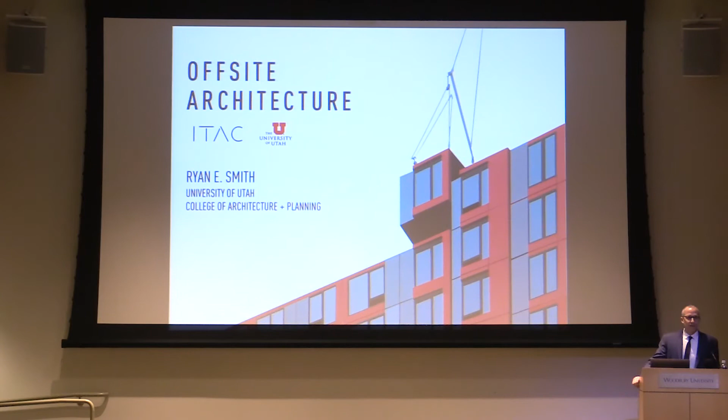Yasushi told me that his students are going to achieve better grades if they move closer to the front. No, that didn't land, did it? No. Okay, thanks for having me.

I really appreciate it. I'm from Salt Lake City, Utah. If you're not familiar where Salt Lake City is, it's on the edge of the Wasatch Front ski territory. Please visit, come. I'm a bit unique in that, yes, I do have many children. One wife, but many children.

And this is Lindsay and my kids. And the boy in the lower left-hand corner is Owen. He has his leg broken. This was last year. We pretty much have one of our kids in this situation at any given time. So in order to avoid having to parent all the time, my wife and I travel a lot.

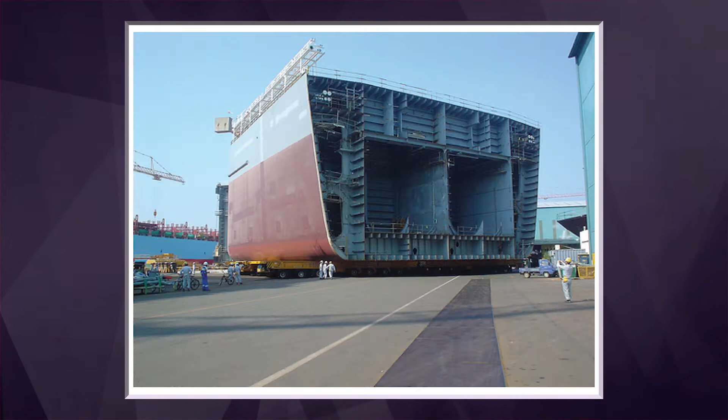We go to factories and job sites throughout the world. I just recently got back from Japan. And because I like to go visit buildings, which all of you do, my wife isolated me one year in the summer in the Caribbean on a cruise ship. But what do you think happened on the cruise ship? I was really interested in this, right? This is an incredible building, by the way.

It is unsustainable, I will say that. However, it does take care of thousands of individuals' waste and is able to process it. We had an opportunity, my wife's a chef, and we took the tour. If you're ever on a cruise ship, take the tour of the kitchen, the back of house operations. It's absolutely incredible to see how they can take care of that many people in a small space.

Because I'm interested in production, how things are made, today I'm going to talk about why, what, when, and how of what's called off-site construction or prefabrication. So let's start with why.

Why are we even talking about this? If we think about the production of buildings compared to other production industries, say the production of this water bottle, right? Buildings are unique when compared to this water bottle in three distinct ways. I might call them the peculiarities of construction or architectural production. Number one, the site or the place in which the building is made, unlike this water bottle, is unique every single time. The program, or the form of this and what function it has to serve, is unique every single time. And the labor that is used to produce buildings is mutable and inconsistent every single time.

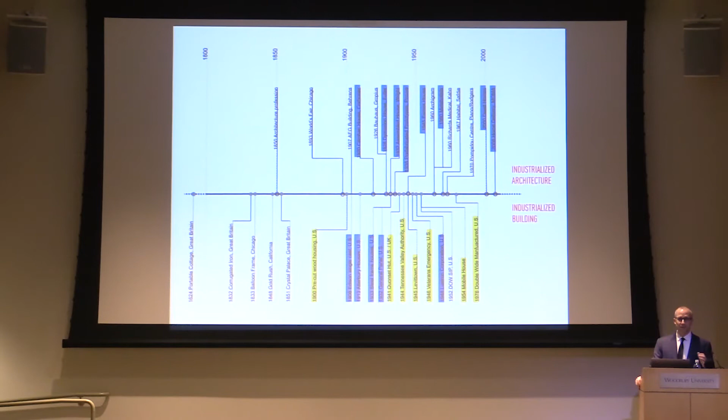The history of industrialized building or factory-produced building is long. This is not a new idea. If you've taken history from many of your professors here, you students or professionals, you know that this history is rich. I like to separate this into two different categories, however: one called industrialized architecture and the other called industrialized building. Sometimes these things overlap, but if you look at the history, they are quite distinct things.

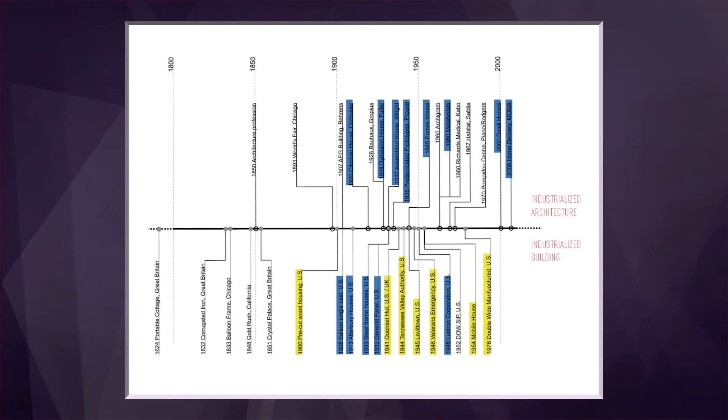If we look at industrial building, the ones in yellow are what I would call successes, meaning they served the masses. They helped people find shelter. They were affordable. This is primarily talking about housing. The ones on top are all architecture prototypes. They were one-off and never mass-produced. So it's interesting that we don't really find any solutions in the architectural realm that had an impact on society outside of a movement, a Gestalt movement, or some kind of aesthetic movement. What I'm interested in, the precis for this talk, is architecture serving more than just a prototype or an idea, but housing people and providing shelter in an affordable way.

So what do we learn from these lessons? These are four lessons I've pulled out and written about. One is from the history books: proprietary systems, meaning systems developed primarily by architects that are very unique in their details, are difficult for mass housing because they're difficult to reproduce. I'll give an example of Jean Prouvé, who was an industrialist but also an architect, French, who built some beautiful things. But they were all proprietary, and when they needed to be replaced, there was no one to do so—there's no factory to support that. Whereas the simple 2x4 wall is incredibly mass-produced, and it's also very easy to adapt over time.

Offsite, or prefabrication, is the research and development of a technology. Insomuch as a formal idea or an aesthetic idea might be in an architect's mind, ultimately the technology does have to play through and work. More importantly than this, offsite is a business plan. We've seen a lot of architect-led prefabrication companies pop up—there are many here in California as well. The challenge is that architects are not trained to think about the business model first. That's not where we succeed. But if there's no business plan, no business platform, the product won't succeed.

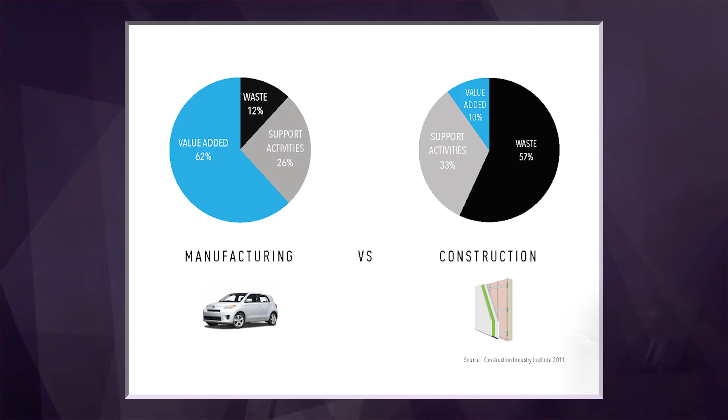So we did a study where we analyzed a Toyota Scion, which is a baseline model car. How much does this sell for on the market, do you think, baseline, new?

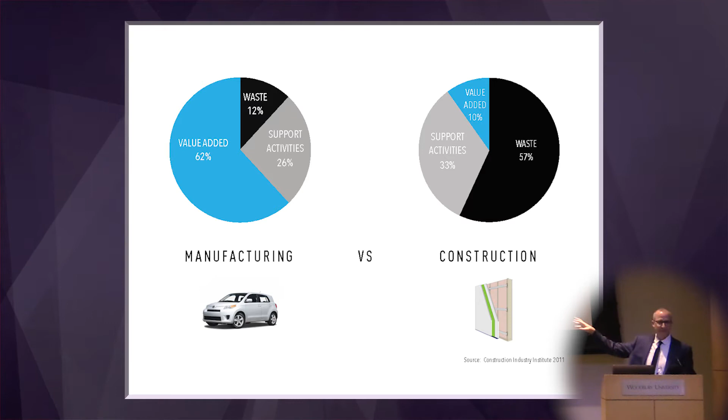17, yeah, 15 to 17,000. And on the right is a non-load-bearing fire-rated partition wall insulated for sound attenuation, 2 layers of gypsum board on either side and lined. Through the life cycle of performance, these cost the same amount of money, right? So the question is, why can't we do that on the left? What's the problem, right? And not only that, but that keeps you cold and hot for about 15 years before it dies, right? And then there's an incredible way to recycle the thing on the left, whereas on the right, it goes into the landfill.

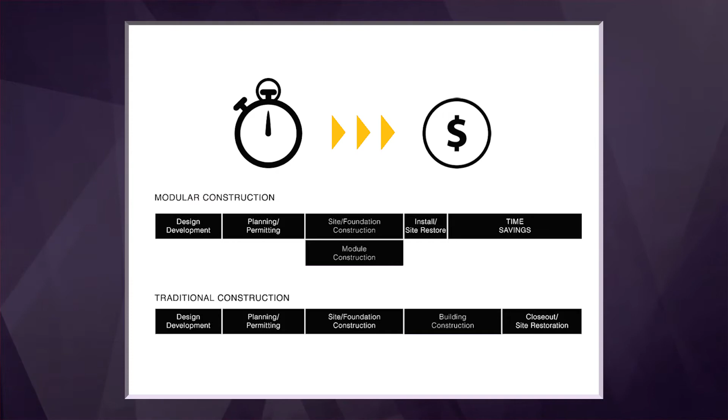But we do know that offsite is offering some other benefits. Schedule. It's been documented ad nauseum that schedule is the primary benefit of using a factory-built process. And that's because you can be doing all of your site work whilst you're building elements in the factory, and thereby concurrent scheduling and overlapping, you can reduce the overall time savings.

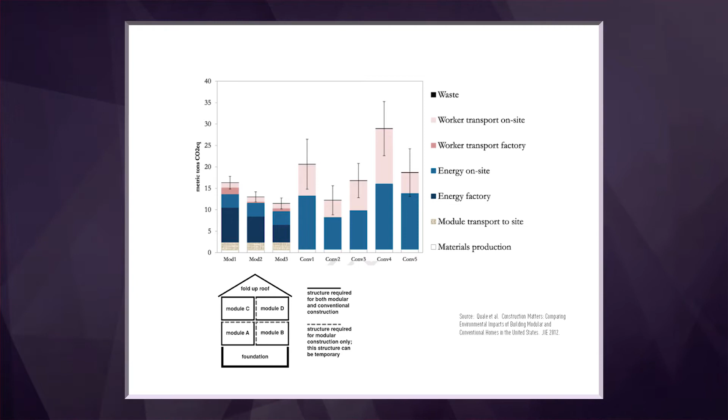And in fact, yes, modular is lower from a carbon investment standpoint, but it isn't because of the waste factor, which you would think, right? Less waste in the factory. That was a very minuscule contribution to the study. What they did find, John will tell you, is that it was the carbon saved in workers going to and from a job site every day versus just going to a factory and staying there all day. So it was the transportation component that was the big deciding factor.

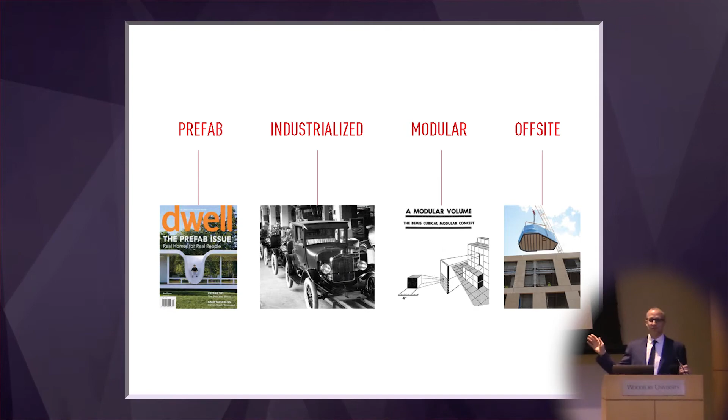Another word that's used often in reference to this is industrialized, or industrialization, industrialized building, industrialized architecture. And that harkens more to the factory environment and what the factory does. Then there's modular, which really became popular under Bemis, Albert Bemis, who was an industrialist that mass-produced toilets. Sometimes when you're in the bathroom, you look down, or you're about to sit down, and you see on the back of the toilet, it'll say Bemis. The family still owns the Bemis factory, producing toilets for our country and others. He had a whole foundation set up after the money he made to investigate prefabricated housing, and really coined the term modular as a solution for housing.

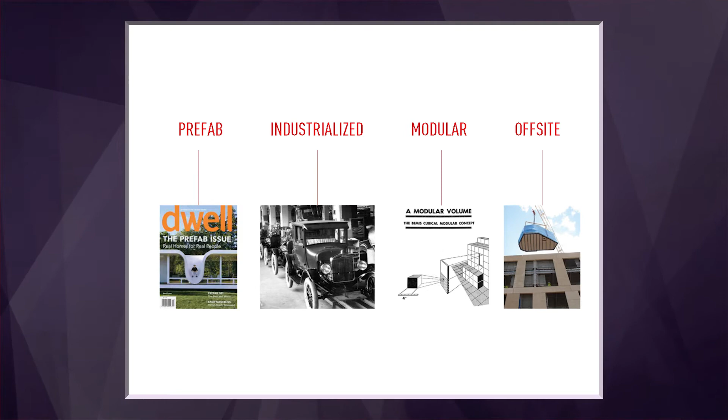We still use it today. But in other countries, they use different terminology to describe modular that's a little more accurate, not to be confused with a modular organization system, like a modular grid or a design system, or with Corbusier's Modulor, right? So they use volumetric building or unit-based building. This is to describe the box used to build the building. And then offsite is a catch-all category that includes modular and a lot of other solutions.

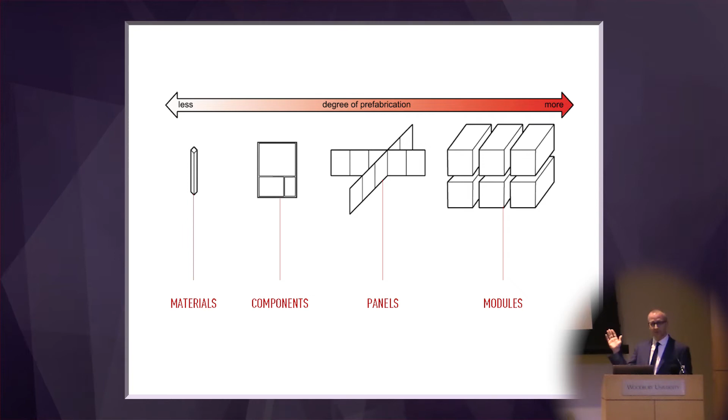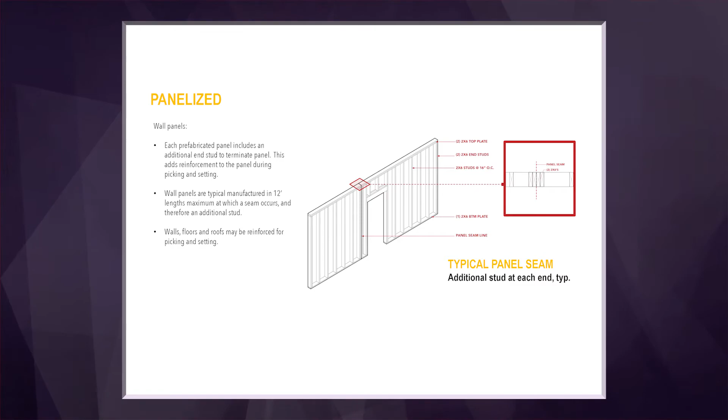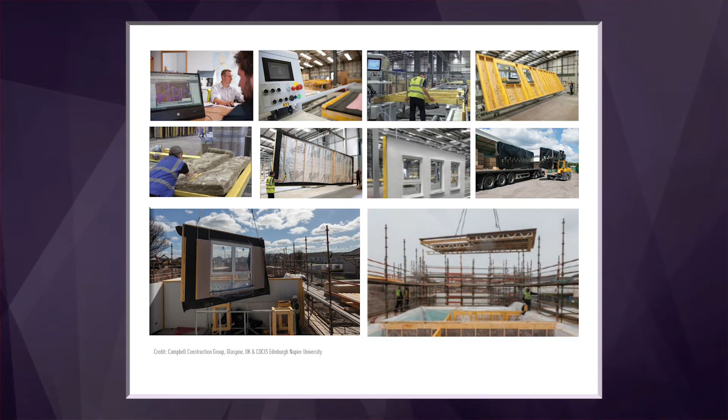And then vertically stacked on the back of a truck like this. If you do it horizontal, the finishes will crack, so they vertically stack it and then pick it off. And again, they have windows already put in them. And these are called wall panels, roof cartridges, and floor cassettes. That's the nomenclature. In Scotland, about 70% of all of their residential construction, from single family through to multifamily, is built this way.

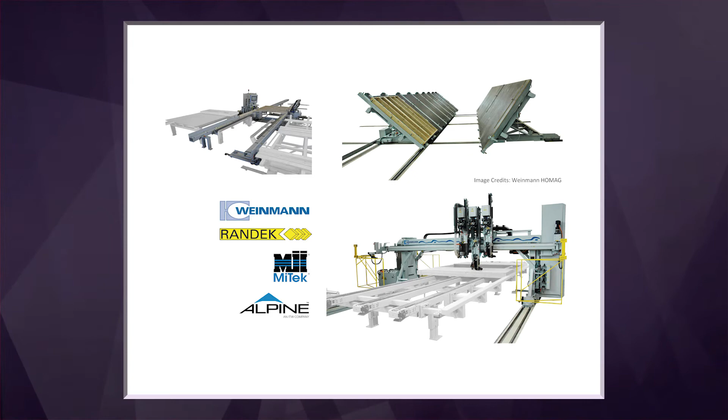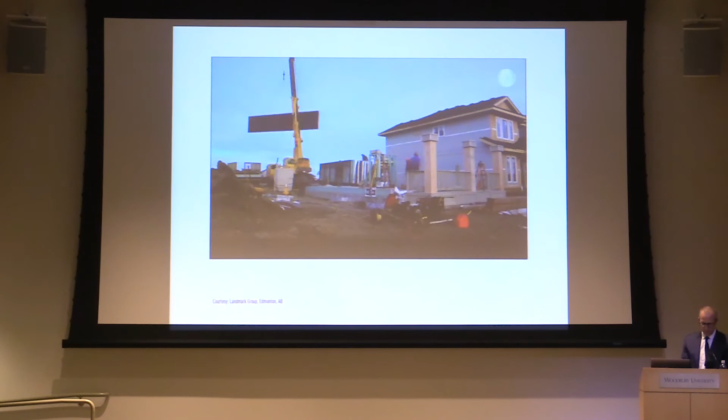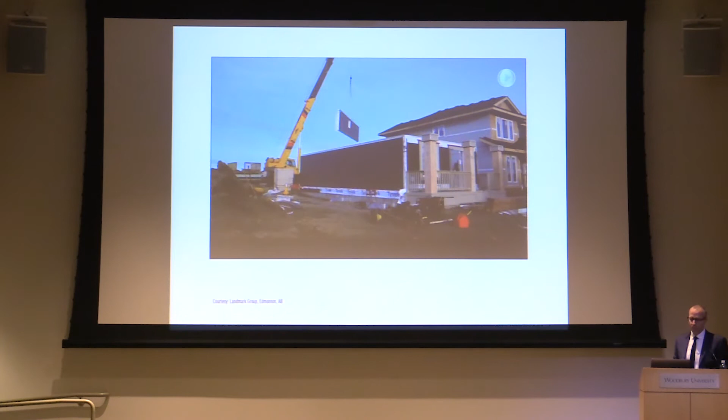This is an interesting company. They're actually located in Alberta, Canada. They're probably the most sophisticated in North America. They have a complete German system that builds these. They've gone to multifamily now, and they find greater value doing that.

But their goal, as is the goal that was started in Sweden and came over to North America, is to be dried in in one day in a single-family house. The idea is that you don't want any of your materials getting wet. So especially in places like Canada, right, where your weather is very poor. So again, we're still on day one here.

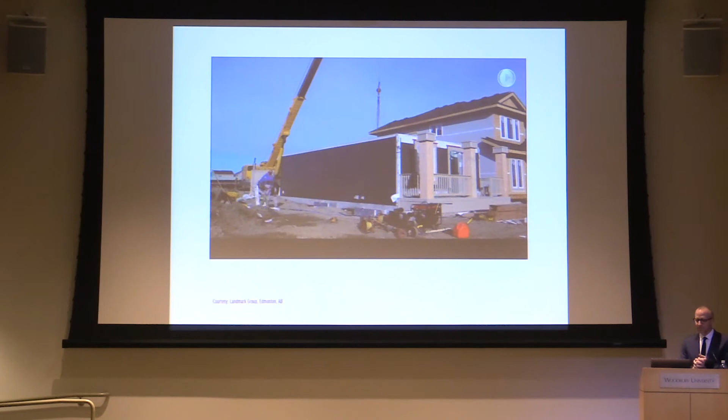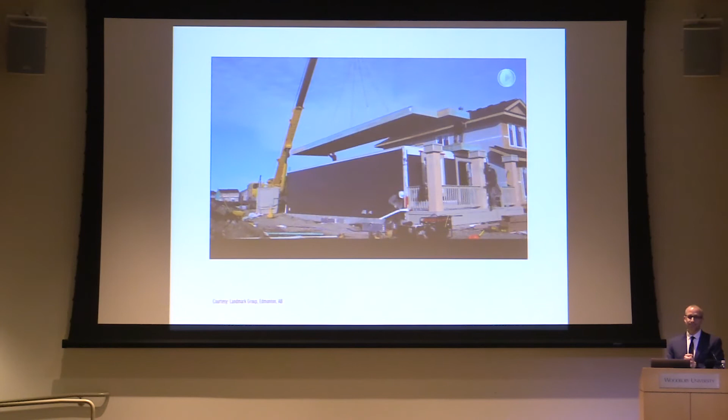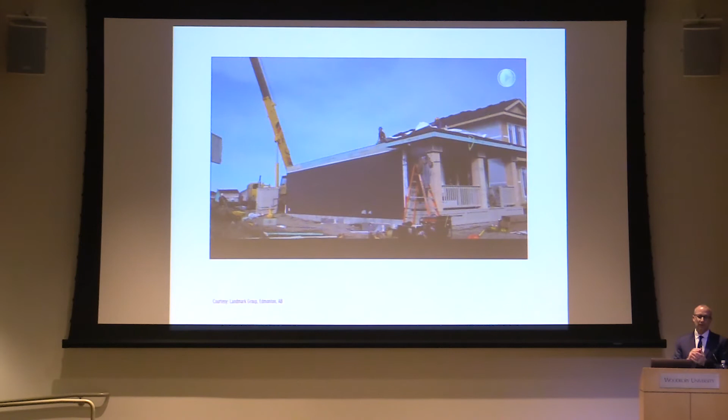Are these customized things, or are they all off-the-shelf components? Both. They do both. So regardless of what they do, they fully model this in the computer beforehand. There are 2 or 3 systems, or software, that have been developed. One is SEMA. It's probably the most sophisticated. SEMA does heavy timber joinery, but it also does light wood frame systems, packages.

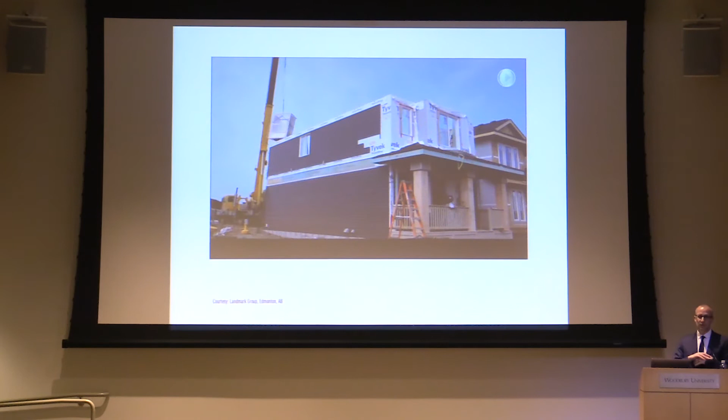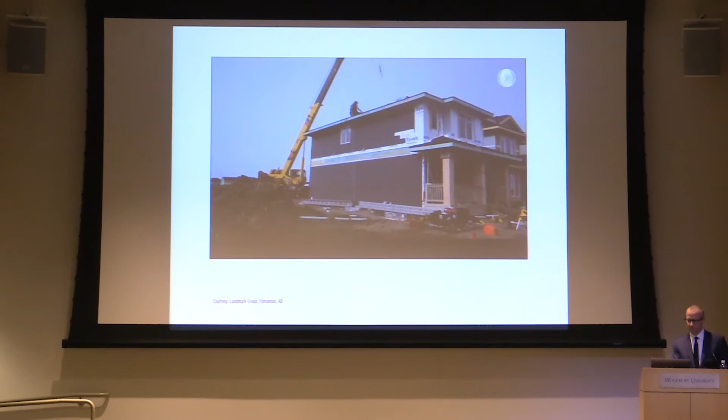And it's all pre-cut on what's called a speed cut. And there's maybe 2 companies that produce machines that speed cut. That means you tell them what the size of the stud is, you run it through, and then it pre-cuts it. And it puts RFID tags, radio frequency tags, on all of it, so you can track one stud all the way to its installation in the field. That's the idea. These are roof modules. They're pre-shingled in the factory. Okay, so that's day one.

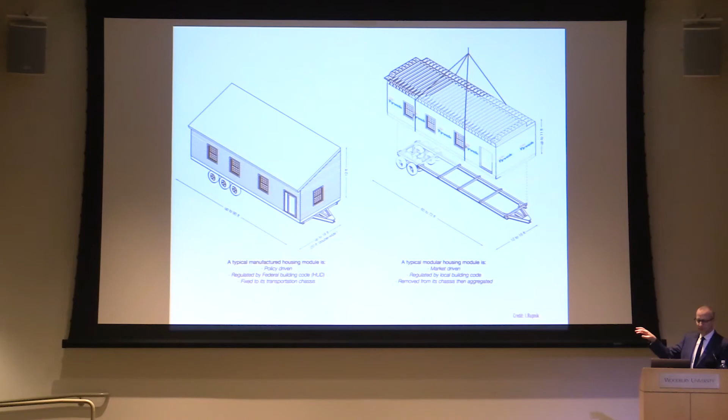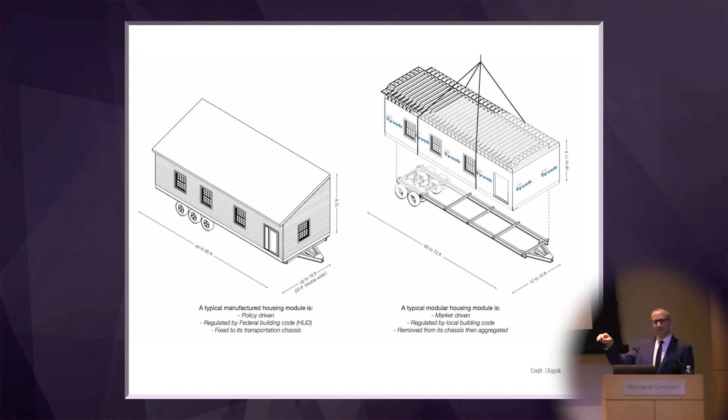I talked about the difference between these two. A HUD home, or manufactured home, continues to have its chassis attached to it through its life. Whereas on the right, what we're talking about is an IBC or an IRC code compliant built module or box that is put on the back of a flatbed or a trailer and then lifted either through a belt strap or through hooks at the top into place. So it's different. It's built to the standard code.

Modular or volumetric built, it does use more wood in that you have double the structure in the floor. So for instance, your floor is built just like a normal floor, and studs, and then you build a ceiling. Usually it's a 2x6 ceiling.

And then you build another box on top of that has a floor and a ceiling, so you're doubling up the structure. At the joint where the walls come together, it's the same thing: you have a 2x6 and another 2x6 next to it. For housing, it works beautifully because you get a lot of redundancy. It works really well for fire ratings, and for acoustics it's very good.

So here's 4 boxes that are stacked one on top of another. This is for an effort we're going through to try to develop standard details, which the industry doesn't currently have.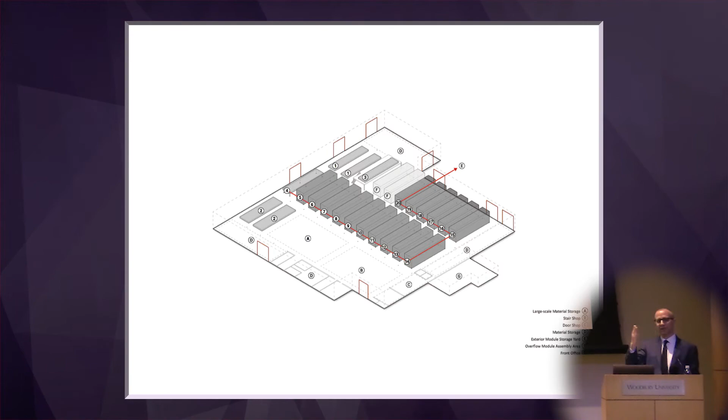Just like a car, an auto manufacturing process, each station has a certain takt time. That's a lean term — it means it can only be there for a certain amount of time, and it's got to move down. You've got to keep that takt time.

In the US, we probably average a takt time of about 4 to 8 boxes a day. I just got back from Japan, and I was telling everyone — I was at a factory there with a takt time of 2 minutes. So a box comes out the back every 2 minutes. It's pretty amazing.

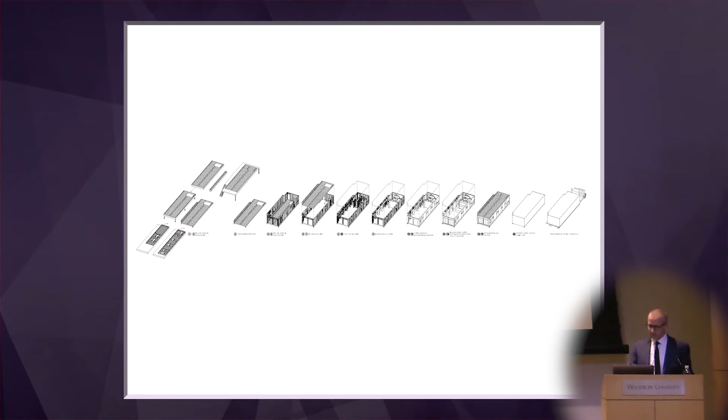This is the sequence of operations as it produces the module and then puts it on the back of the truck. This is a project in Philadelphia, just to show as an example — a student dormitory by Interface Architects, a firm you've probably heard of.

The modules — it's called Modules Project, ironically enough. But what I wanted to show is that sometimes we assume an individual unit, whether it's affordable housing or student dormitories, equals a box or a volume in modular. That's not the case — you can cut modules across units, whatever's most efficient. For instance, in Marriott hotels or other hotels, the boxes are cut across the corridor, taking up one room, the corridor, and another room. If they're large, like a Residence Inn with a kitchen, and you can't get the box within that shipping envelope, you'd have 2 boxes — or 1.5 boxes — making up a room, with a demising wall in the middle of the module. So the modules don't always have to line up to the space configuration, if that makes sense.

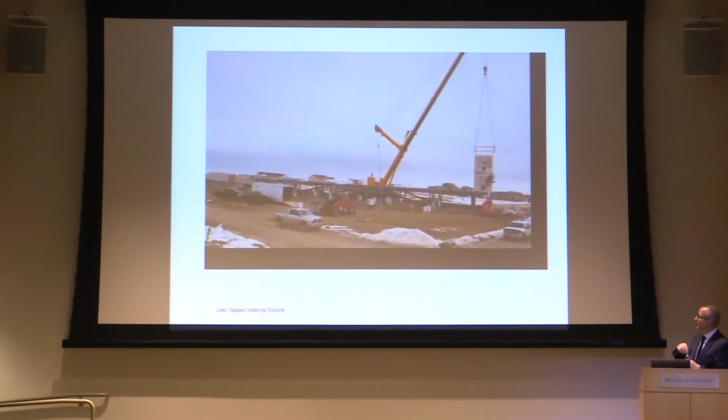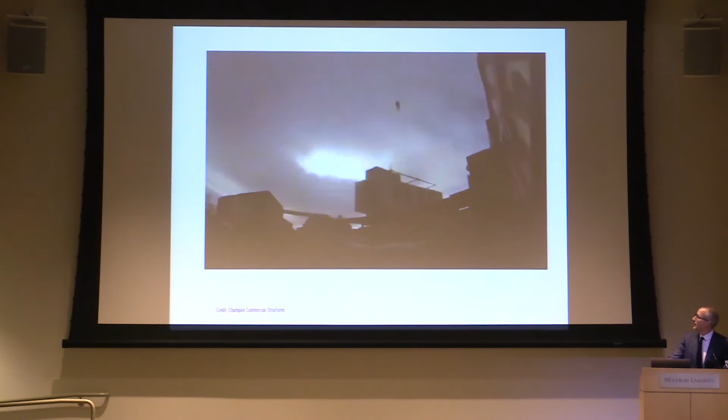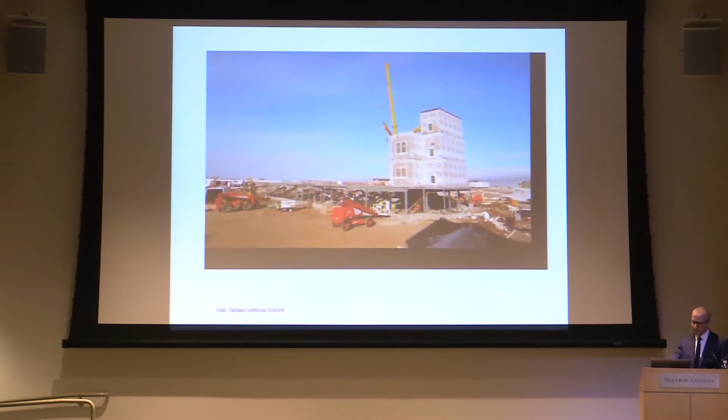We'll just watch one day here as well. I think this is a hotel out near — up in Alberta. Champion Commercial Structures built a lot of these. So that's one day.

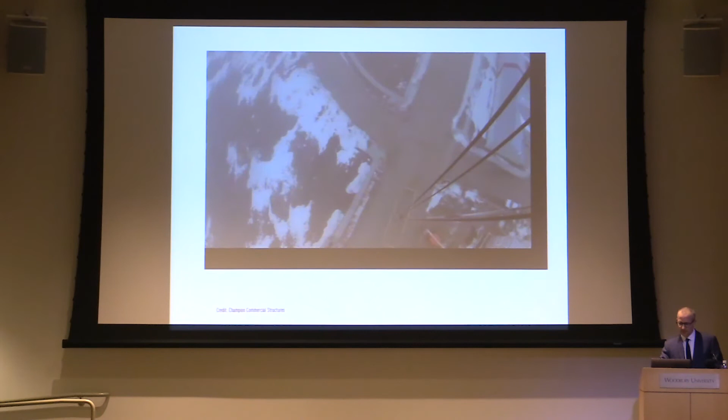And then someone got tricky with the GoPro. But you can see the mechanical ducting in the floor and the ceiling before they're stacked.

Some of the innovations that have come out of this industry that I think are pretty fascinating — I try to write about them. One is the folding roof truss, which is this hinge, so you can fold the roof down in the factory and have it finished, and then when it comes out to the job site, you can erect it. This is because the shipping envelope doesn't allow you to get as high as you might need for a particular roof on the top module.

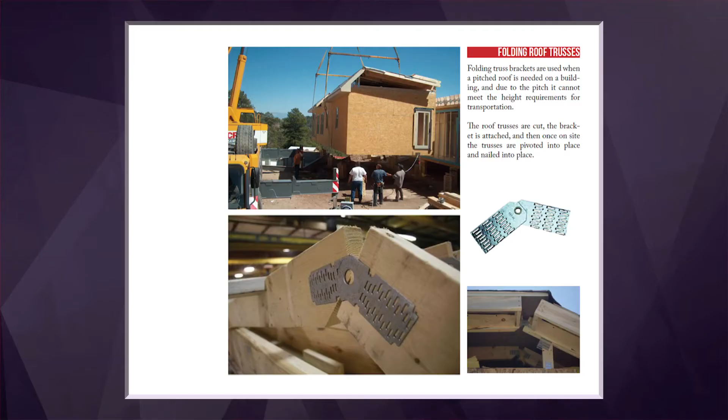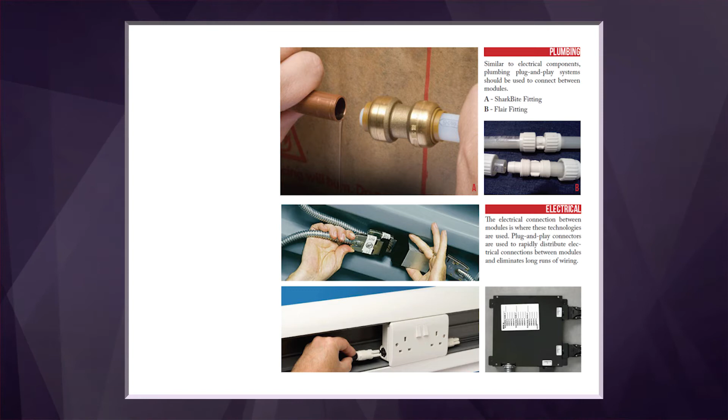Another interesting technology that's come out of this industry and is now making its way into traditional construction is quick connect plumbing and electrical connections. They're just plug and play, and they have kind of sharp teeth in them, so you push them in and it pulls tight.

As I mentioned before, the transportation envelope really is the restriction for a modular box. You can get up to 2 boxes on the back of a lorry or a flatbed. There are different flatbeds. Some, like a low boy, will give you a lot of height, like upwards of 16 or 17 feet on a box, but you don't get as much length. Whereas a flatbed might give you a really long module, but it won't be as high. So it just depends on what you're going for.

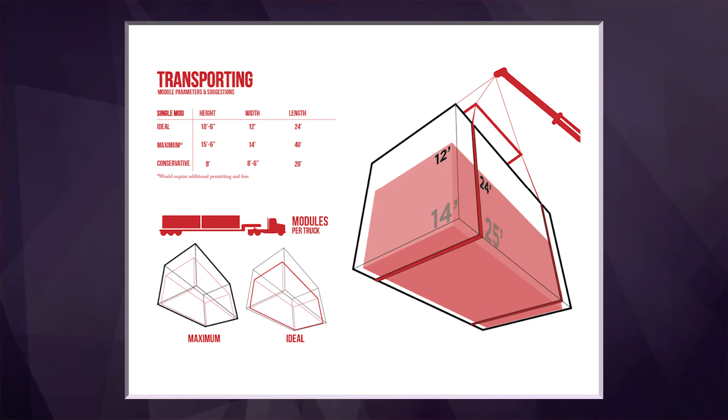The ideal dimension for width is about 12 feet. Beyond that, you're going to run into significant transportation problems. The single factor that often rules out modular construction as a choice among project teams is the fact that once you go beyond 14 feet, you have lead cars or special permits that cost you out of the market.

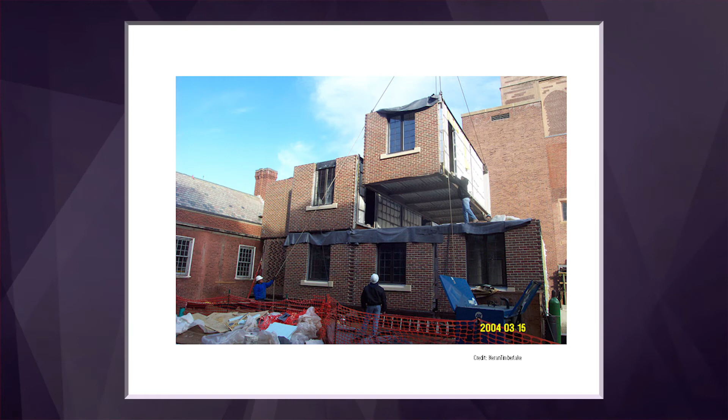This is an old project from 2004, some pioneering work by Kieran Timberlake at Yale University called Pearson Modular, where they pioneered hot-rolled steel modules. You can see the date on there. They did some brick veneers in the factory and assembled it in a quad. The crane operator couldn't see where these were being set, so they had a little television, and the camera was on site, and they were having to place these without being able to see the site. I think that's pretty fascinating.

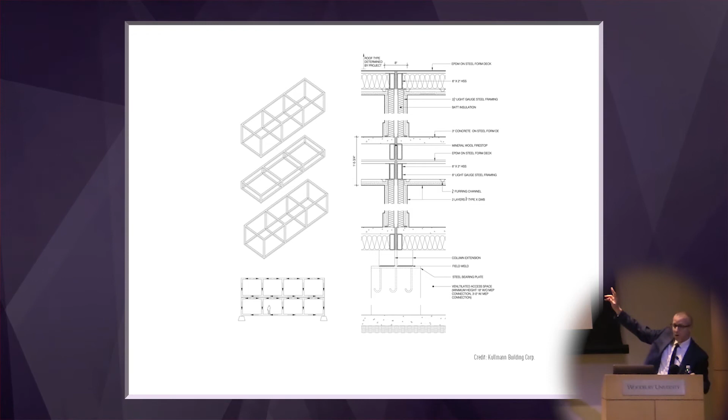Here are some of the details. This is just a section that's been cut where two mods are joining. You have the ceiling plane, two floors, a floor and a ceiling, and then another floor. In hot-rolled steel, they get stacked, and you're using quite a bit more hot-rolled steel. But in a multifamily or dormitory, you get those wall breaks, which allow sound not to transmit. These are called mate lines or match lines, that's when the boxes come together. You usually leave the finishes off about a foot on either side so that in those zones you can finish them, whether it's tile or gypboard or whatever it is.

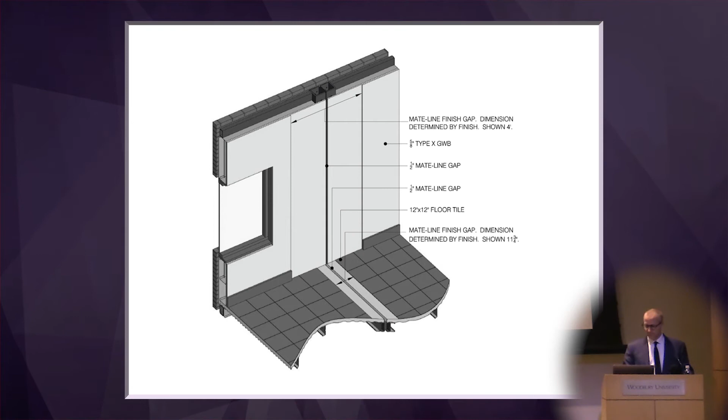In section, you can see where two mods meet. Say in a brick veneer, you would also need to leave those areas open with flashing behind it so that you can come in and finish it with the brick veneer.

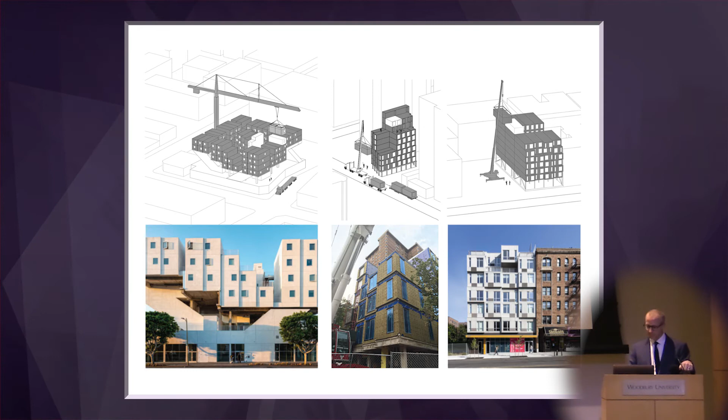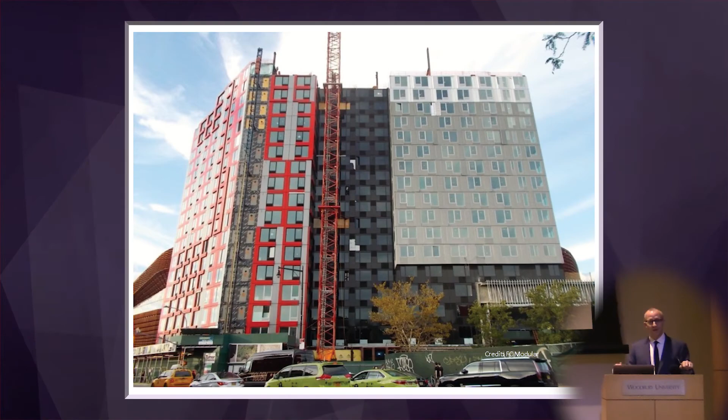You're probably very familiar with this project from the news. This is B2 Atlantic Yards by SHoP Architects, which had all sorts of litigation and problems. Really, it was a tolerance issue, not being able to get the mods exactly on point, but also there was no way to shim these modules so that the skin would align as the modules continued to creep in dimension the higher you got.

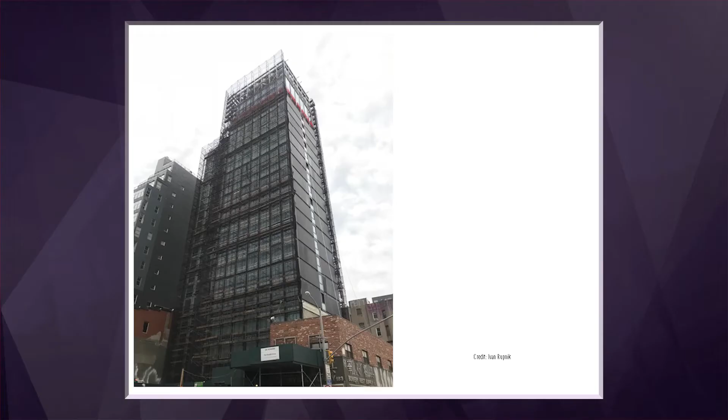I often argue that, yes, I know we're in this phase of building tall modular buildings, but I think there's actually a sweet spot in the low-rise category. I think that's the case for CLT too, but that's my opinion.

So this is Citizen M, currently being built. This is a photo from about 3 days ago that Ivan took for me in New York City. This is a hotel. These are shipped in from Poland, actually.

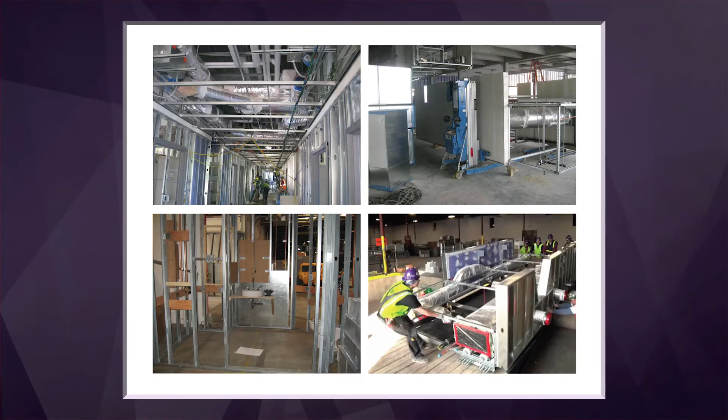There's some other offsite work going on. I don't want to get into great depth, this is called multi-trade prefabrication, but you should be aware of it, especially students who are going to be in the industry with large contractors such as Mortenson, Whiting Turner, or Turner. They are going to this method, which is you either lease a warehouse nearby - it's called near-to-site manufacturing. So basically you're taking your trades that would be on the job site and putting them in a controlled environment in the warehouse, where they build elements like mechanical racks, bathroom pods, things that are really tricky where trades converge and cause schedule problems. They do this in the factory or warehouse near the job site, then bring them to the job site and install them just in time.

These are bathroom pods that have become very popular, especially in hotels. I think the majority of hotels use these now. You don't know you're inside of a bathroom pod when you're in a hotel, but that's what you're using.

When does this happen? We've done quite a few surveys for the industry with the National Institute of Building Sciences. What we're showing is that the barriers to using offsite construction are primarily in design and construction culture. This is the way we've always done it, so we don't want to change. That's what the industry is saying.

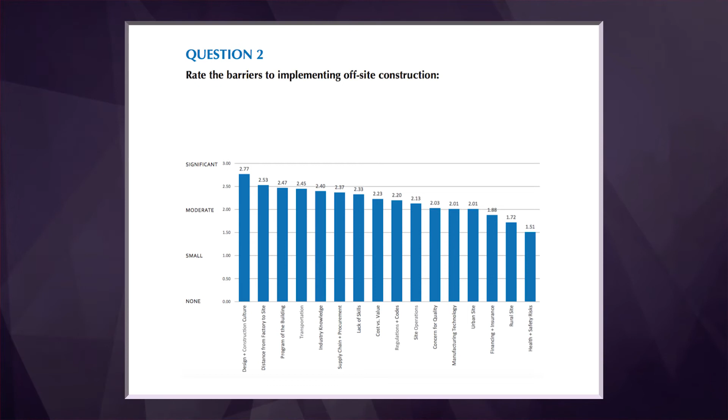And distance of factory to site. The program of the building may not dictate it. And again, transportation always enters into the top of the equation. We've found that about a 300 to 500 mile radius is the maximum. Outside of that, you usually cost yourself out of the solution.

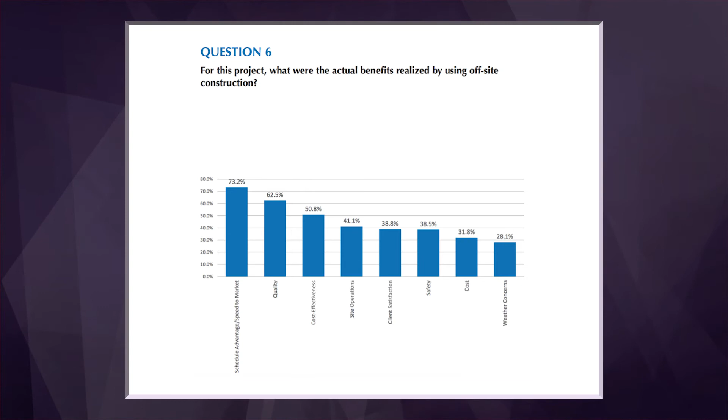What were the actual benefits if you've done an offsite project? The benefits: schedule came up as number one, then quality, then cost effectiveness. You'll note that cost is down here, but cost effectiveness is much higher. And the way we define that in the survey is cost effectiveness means cost control as opposed to lowest cost.

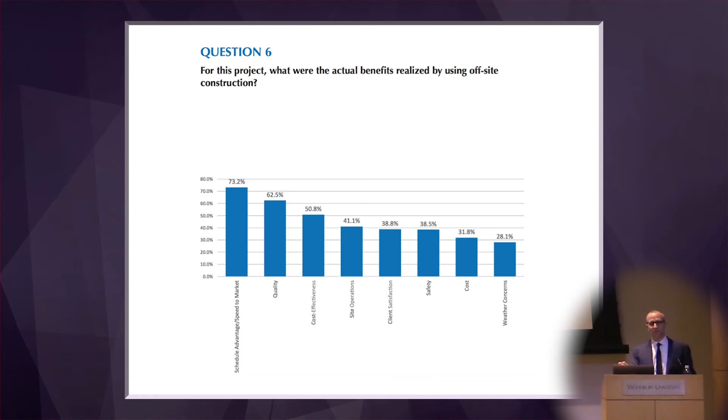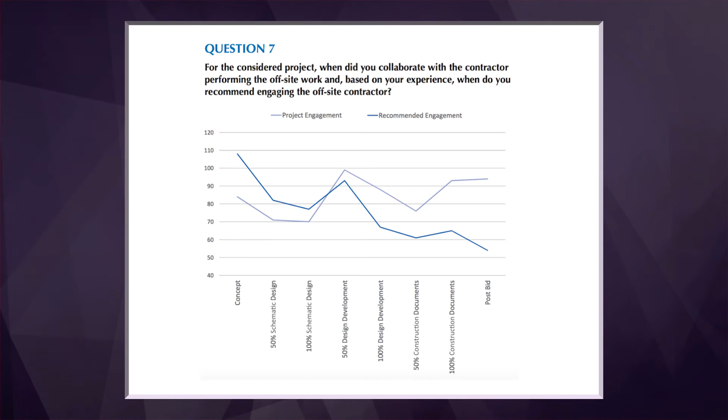For the considered project, when did you collaborate with the contractor performing the offsite work? When did you collaborate with the factory? When did you engage them? On the light blue, we see when the project engagement actually happened. The majority of the time they engaged them at 50% design development or through 100% design development. Some way in post-bid, but majority there.

And then, when do you recommend, if you were to do it again, when do you recommend engaging those factories? They all said right at the beginning, in the concept stage. We found this in our own work. We found that when you make the decision as an architect to use prefabricated elements and really think about it critically past design development, you have a negative schedule and cost implication on the project.

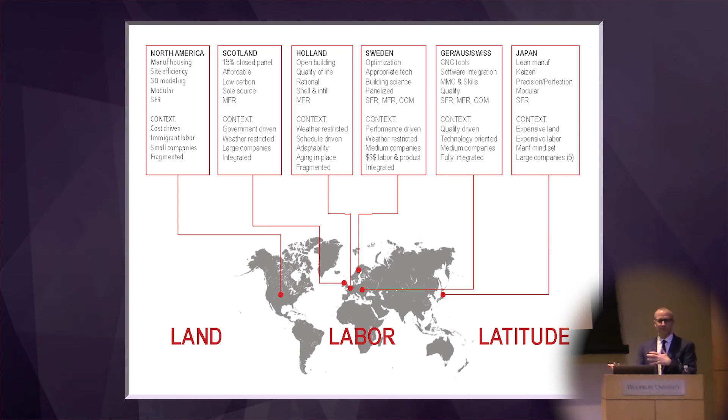And finally, in this section, we're currently doing a study in which we're documenting all these different countries. And what we are finding is that the context in which they are doing offsite construction really dictates the type of offsite construction they're doing. So sometimes we see, as architects or engineers or contractors or owners, other countries doing certain things, and we say we should just do that. But that's not context specific.

We have a very unique context here. And so what I'm arguing for are 3 elements we found that have a higher propensity for offsite construction than not. I call them the 3 L's. Number 1, land is really expensive in places that have offsite construction. The labor is really expensive and skilled. And the latitude tends to be really, really high, right? They tend to be in places that rain and snow a lot. So these 3 factors converge. You have a place like America that has relatively cheap land, immigrant labor that's relatively affordable, and pretty good weather.

It begs the question, why hasn't this happened earlier? That's probably why. But we're seeing more of it because of the market demand, as I mentioned.

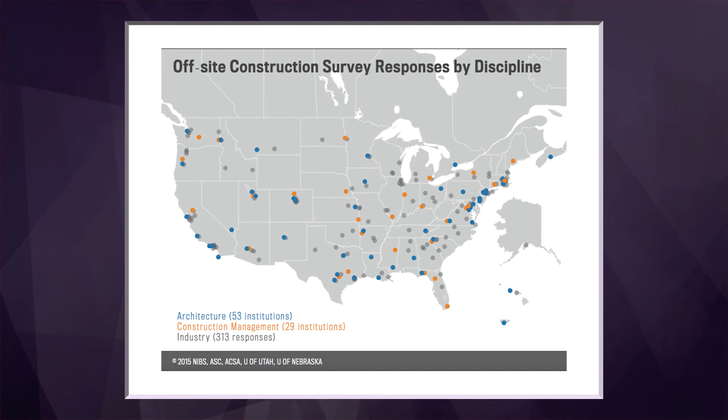I'm just going to go through this very quickly. This is a survey we did where we surveyed accredited architecture schools and accredited construction management schools, the 2 primary fields that are making decisions about offsite construction. And then we also took that industry survey I showed, and we compared them against one another. So we wanted to know what's going on in industry and what's actually being taught in the schools, and where is the gap.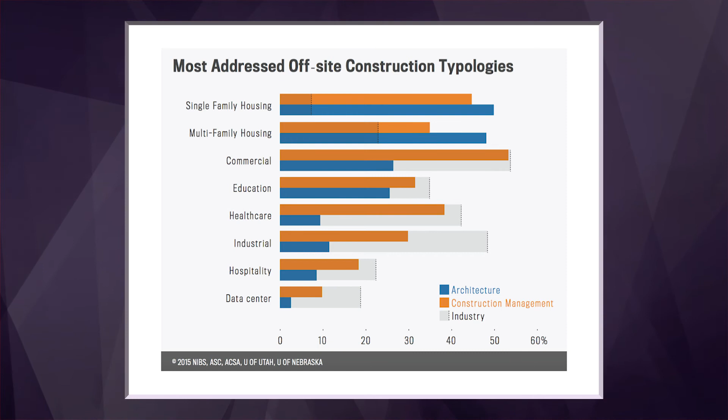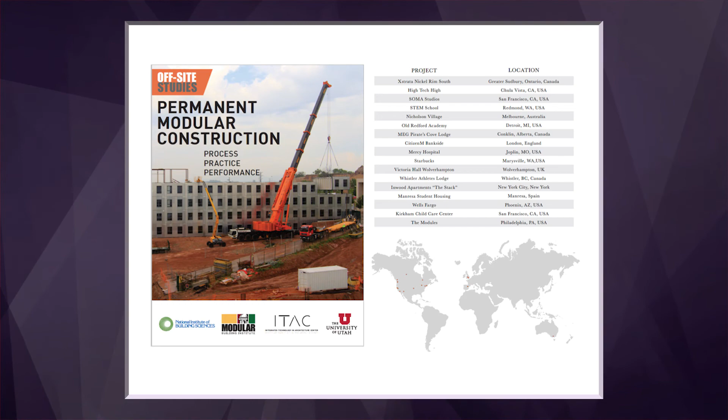How is this being done? This is my last category. We did a study where we documented 17 permanent modular construction projects, built to the IBC code.

We compared them to data that we had collected from Cumming Corp, who's a big construction management and cost estimating firm, to see how traditional construction compared to permanent modular construction.

This was a long project, about 2.5 years. We did these PMC projects in the Western United States, the Eastern United States, Central US, Canada, UK, Spain.

And Australia. Multifamily, workforce housing, dormitories, healthcare, K through 12, office, hotel, retail.

What we did in a comparison method was both quantitative and qualitative. We did a literature review, found as much information as we could. We then ran a...

Because, believe it or not, one of these individuals likes to paint the picture a little bit rosier than the others. So this is a way to try to normalize that data. This is the data we gathered: cost information, schedule information, and labor information.

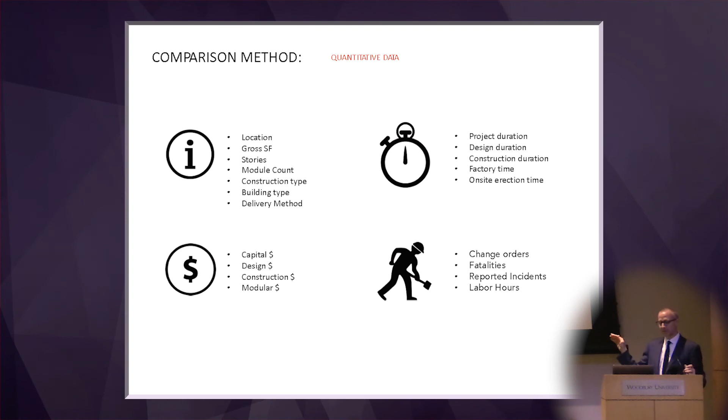We then asked the question: why did you use modular construction? What were the successes? What were the challenges? And did it perform the way you wanted it to? Not talking about energy performance, talking about cost and schedule performance.

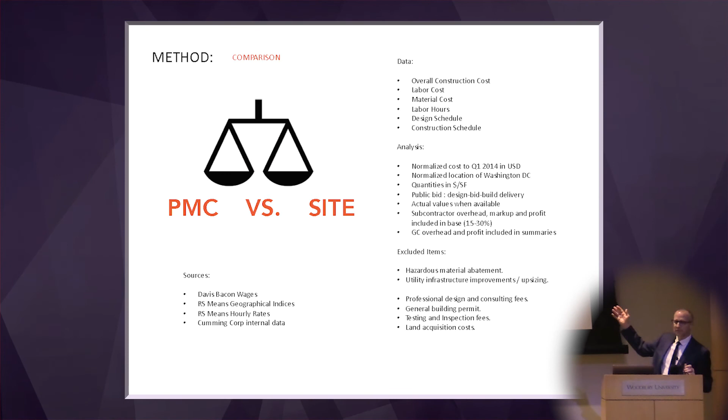We compared it to site-built projects, and I'm not going to go through all this. These are all the fields of data that we used to construct those site-built projects that were comparables.

What we found are a few examples. The modules case study I've talked about before was 26% more cost-effective in that market and 44% faster build than what was going on at that time.

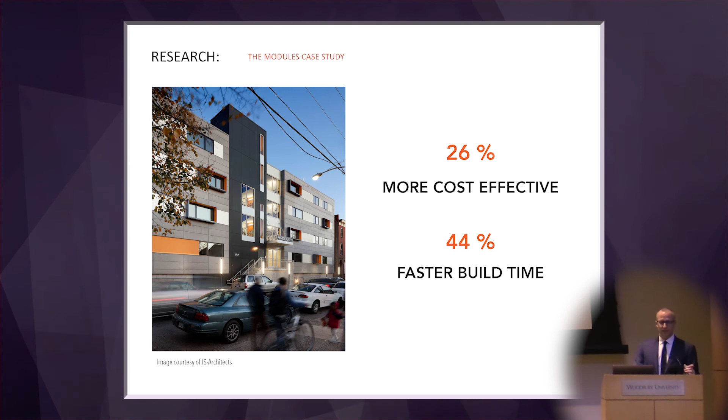158 versus 213. This was all normalized to Q1 2014 data, for lack of a better time, and normalized to Washington, D.C. as a locale. So whenever you have data from different regions or different cost structures, you have to normalize that data as much as possible to make it comparable.

This is a project in Joplin, Missouri, a hospital that was quickly built to replace the hospital damaged in the tornado: 30% more cost effective and 60% faster build time. This project was absolutely schedule driven. That's why it came in so fast. That was the mandate.

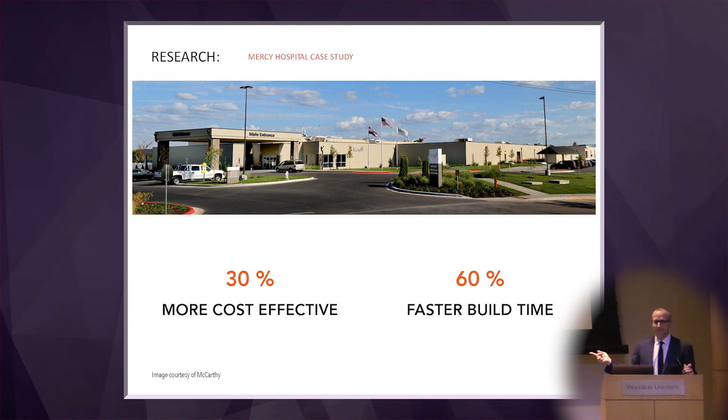So for example, Mercy Hospital was $235 a square foot. The compared hospital project would be $336 a square foot for that region.

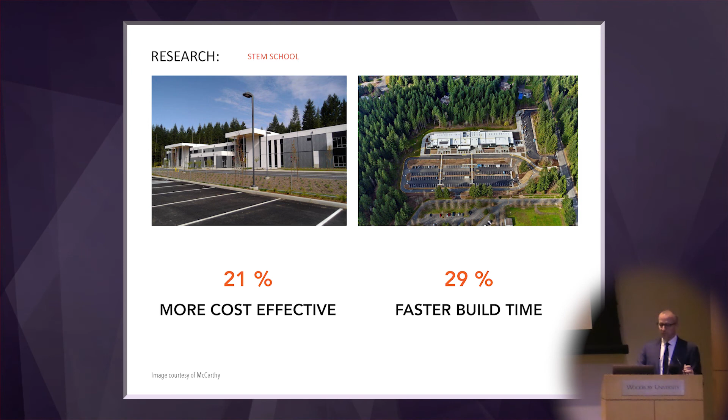And then the STEM school, up in Seattle, was 21% more cost effective and 29% faster build time—compared at $247 versus $312 in cost per square foot.

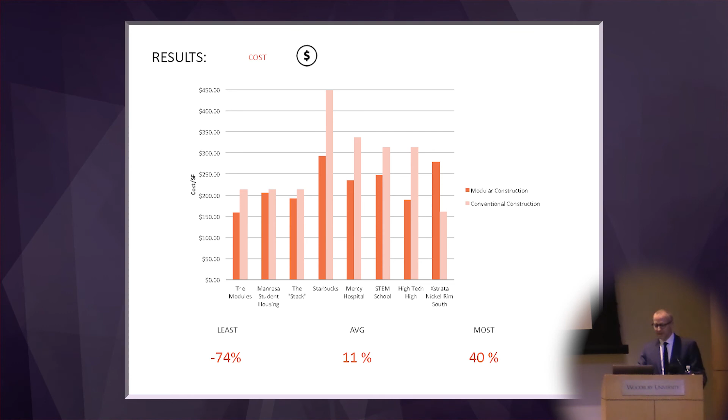And then we took all of these and found the mean averages: an average of 11% in initial cost savings, and schedule savings of 42%. This is not statistically significant because we don't have enough samples, but this took 2.5 years, 3 people, and this is the amount of data we were able to get.

I would also say this caveat, or limitation of the study, points directly to the fact that if you didn't perform well and you knew as a contractor on a project, would you share data? The answer is no, you would not. So we were only able to get data on projects that people were willing to share, and those happened to be pretty successful projects.

I've heard over and over again from architects: great study, Ryan, but it doesn't represent what actually goes on, which is the reason we didn't choose it, it was more expensive. And I would say, well, true, but there are examples where it's working, apparently. So I'm going to skip that.

We did a timber volume study. I was really interested in the question of how much more material is actually used in modular construction or panelized construction. This was funded by the Softwood Lumber Board, FP Innovations, and our partners were Method Studios, an architecture firm in Salt Lake City.

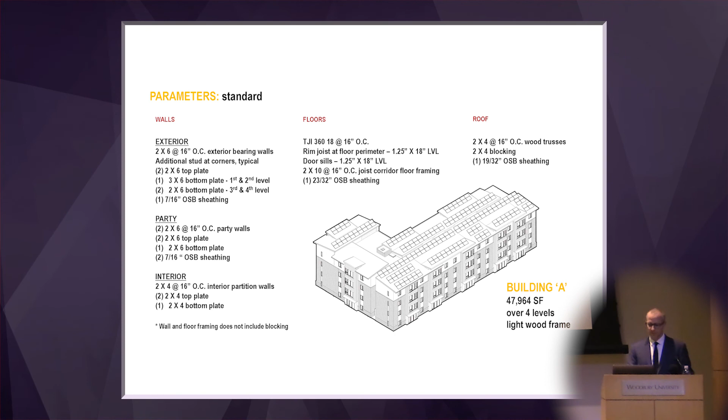We took a building that was a typical 4-story, built on slab-on-grade, multifamily housing project, and we developed a kind of timber volume calculator. We were able to determine, if you were to build this stick-built, how much wood would actually be used, lumber in this project, for the 48,000 square foot 4-level project.

And then we compared that to panelized, if you were to build it panelized or build it modular. We found that there's a timber volume factor, board foot per square foot, of 2.43, and that compares to an increase of 13% for panelized and 19% for modular of just softwood, cut wood, lumber.

Total wood, including engineered wood like OSB and LVLs and all that, there was an upcharge of 69% for modular construction. So it uses a lot more wood.

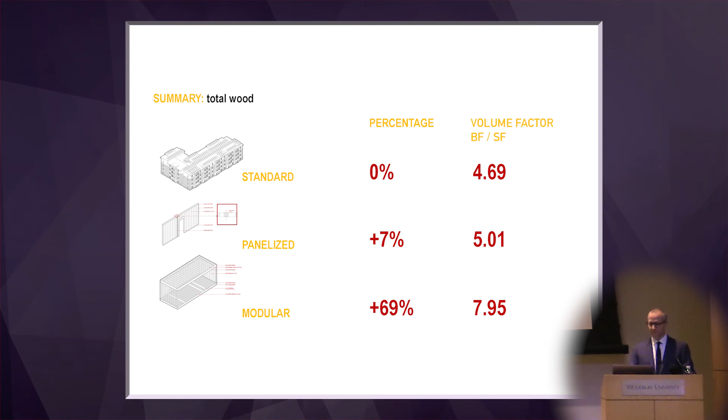What's interesting to me is it's still costing out competitively, which means the labor rate must be reduced significantly in modular construction to make up for the added material cost. Students of architecture, the two things you consider in costing are material costs and labor costs, right? So the question is, how much labor are they able to save? And we need to quantify that still.

Return on investment: we decided to work with some developers and ask the question, if we were to come in 25% or 50% faster on a project, just in general conditions, how much would that save you? And we found that it's about $10 to $20 per square foot.

So for a developer who says, I can get in faster and save that money, it's worth it to me. This is the kind of quantification studies we have been doing over the last few years, just to try to make the case and see if it makes sense for certain audiences.

So in conclusion, I noticed in the call for this semester's lectures there was this question: are architects master builders or are they expert coordinators? Opposite sides of the spectrum. Master builder comes from Brunelleschi and the idea that the architect very much is leader of this process, or does a lot of it themselves, or even owns a factory themselves, right?

They're prefab architects. On the other side, the expert coordinator is basically like an orchestra director who's orchestrating all these parties in this hopefully beautiful symphony.